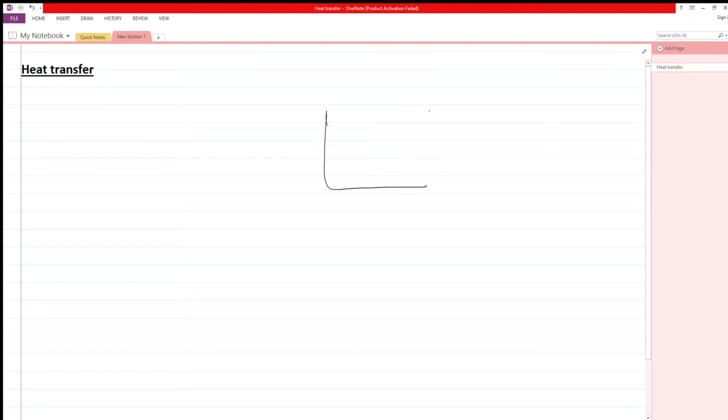So today we are going to start the basic definitions of heat transfer. Actual में heat transfer होता क्या है? So let us consider a beaker. एक beaker अगर हम ले लेते हैं, आप सभी ने beaker अपने घर में देखा होगा. Let us consider a beaker and उसके अंदर पानी अगर भर देते हैं हम, तो it is filled with water.

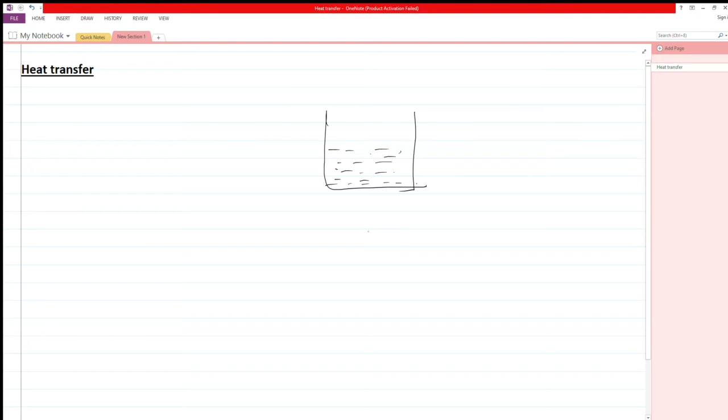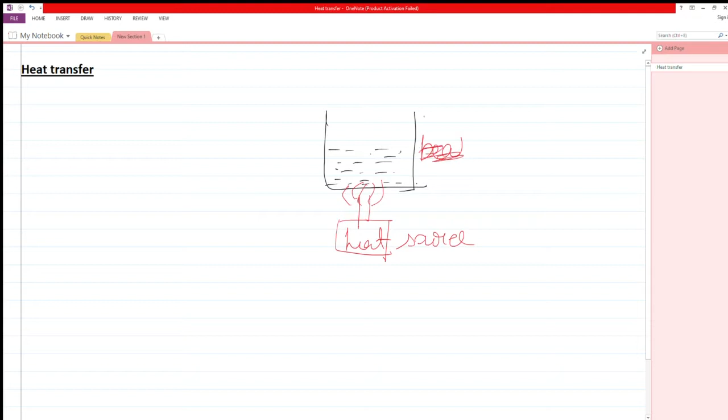And now some flame is there, some heating source we are providing, some flame is coming. This is a heating source, and this is a beaker. Anything you can call it, a container. एक कंटेनर आपने ले लिया और इसके अंदर ये जो है वाटर फिल्ड है.

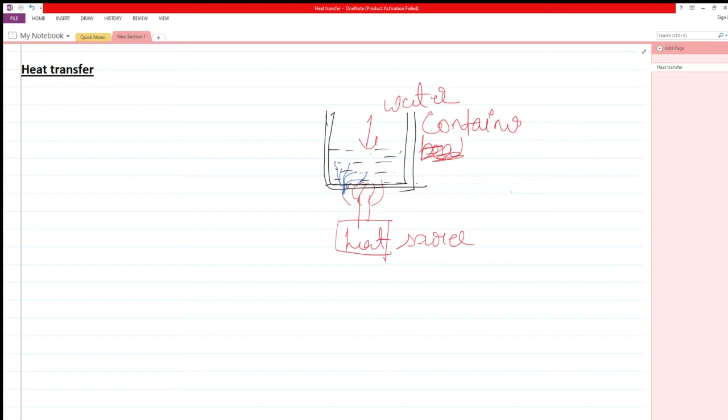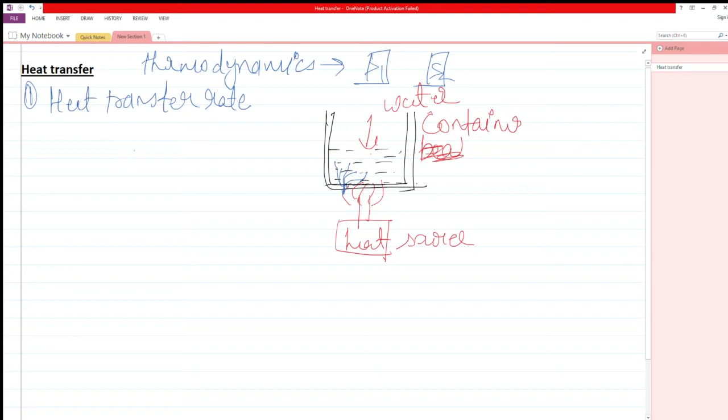The word heat you have already studied previously in a subject called thermodynamics. Thermodynamics में भी आपने heat को पढ़ा है. In that subject you used to study what is heat and how much amount of heat is being transferred from one system to another system, from system 1 to system 2, or from system to surrounding. But now in the case of heat transfer subject, you will be studying at what rate the heat transfer is taking place. So this is the basic difference between the heat transfer and the thermodynamics.

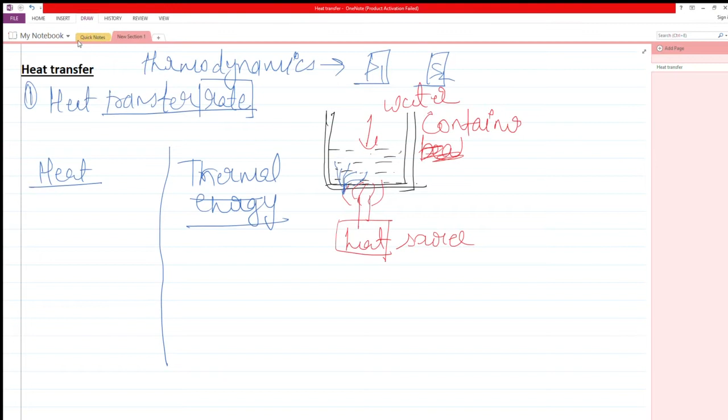So starting with the heat transfer, you are already concerned with the heat. There is a basic difference between heat and thermal energy. If I say heat and then if I say thermal energy, there is a difference between heat and thermal energy. If I talk about the difference, the first and the foremost difference is thermal energy is energy due to randomization. मॉलिक्यूल्स के रेंडमाइजेशन की वजह से जो एनर्जी होती है, दैट इज थर्मल एनर्जी.

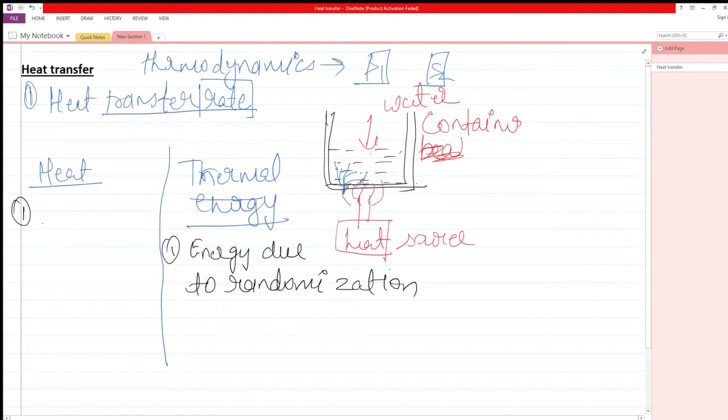बट व्हेन दिस थर्मल एनर्जी इज इन ट्रांसफर, this thermal energy is in transfer, in that case it will be considered as heat. So the term heat is of prime importance when we talk about the transfer of heat. For example, I am having a container and it is filled with some gas.

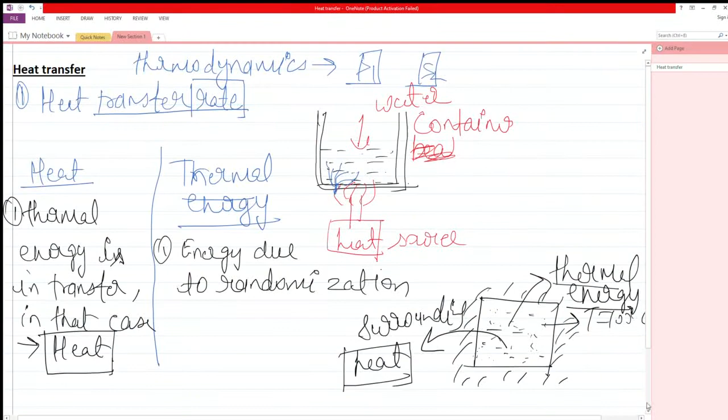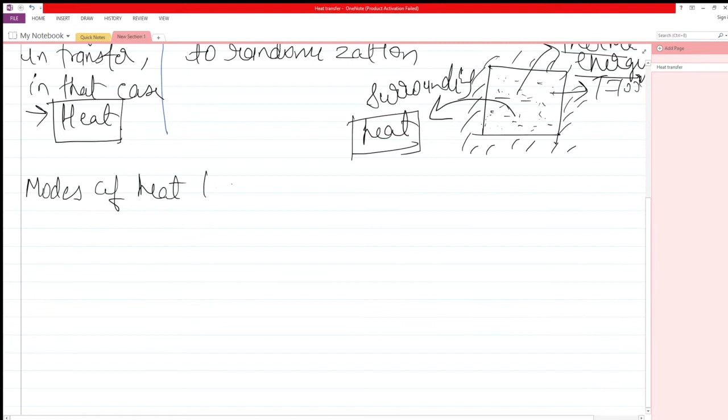So till now we have understood what is heat and what is thermal energy. What is heat transfer? We are also seeing what is heat transfer. The movement of heat from one place to another place is heat transfer. Now let us talk about the different modes through which the heat transfer takes place. Modes of heat transfer. This is very important to understand.

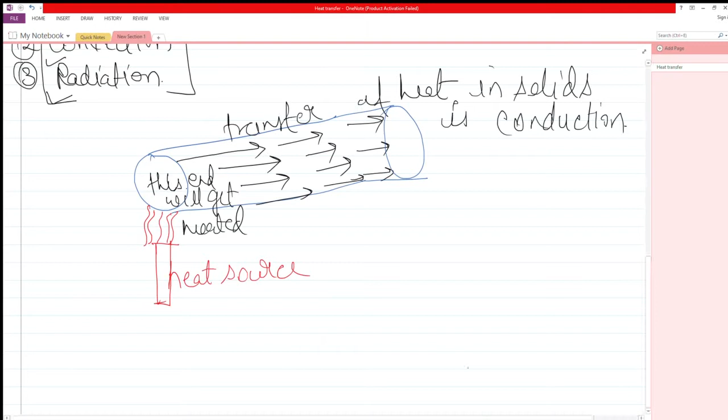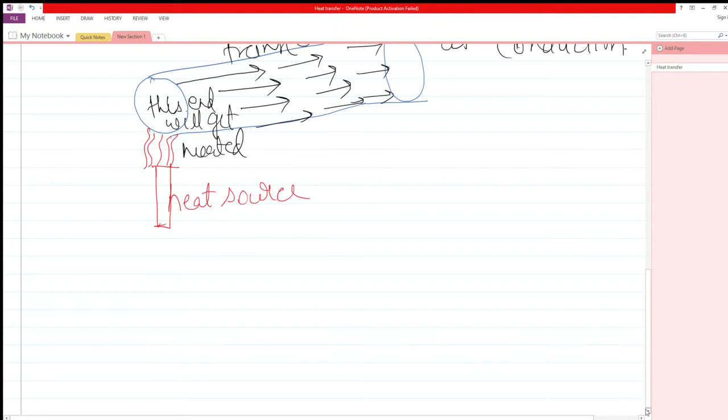Let us see it again. We have a rod. One end of the rod is subjected to certain kind of heat. The heat is getting conducted from one end of the rod to the next end. How it is happening, that is what we have to study. Let me again draw this rod.

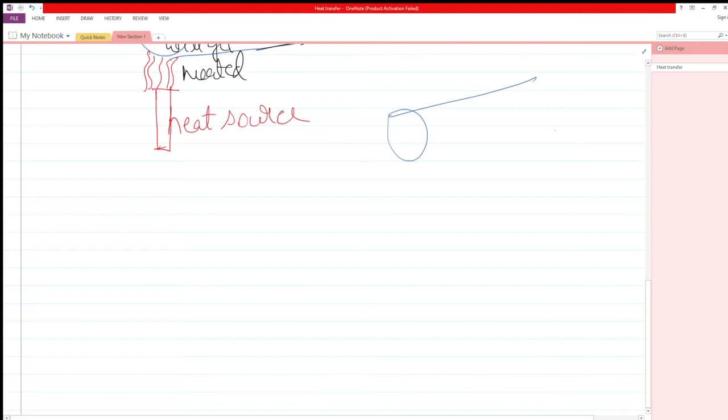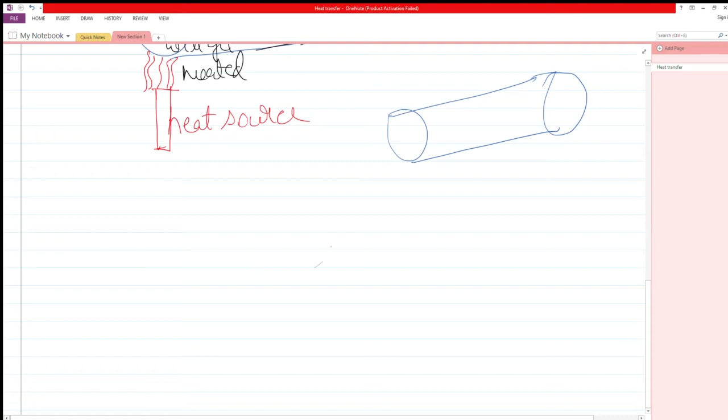So this is the rod. This is the cylinder we have. Let us say there is some heating source, and it is being heated at one end. Since it is a metal conductor, ये एक metal rod है. This is a metal rod.

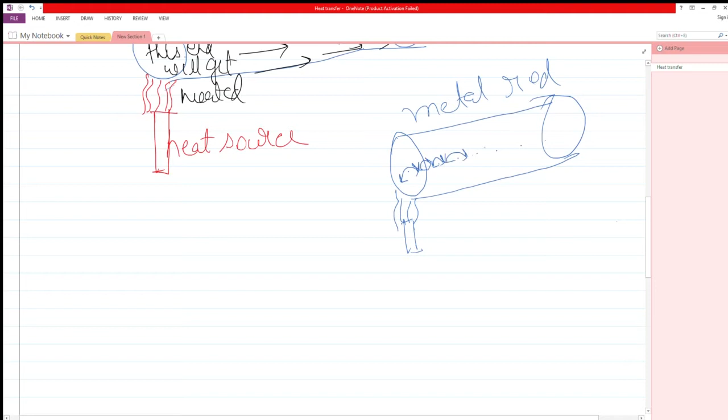In the metal there are certain free electrons available. These free electrons will start vibrating when they get heat from the heat source, and these vibrations are transferred from one electron to another, from second to third, third to fourth, and fourth to fifth. This is how the vibrational energy of free electrons keeps transmitting from one place to another, and this is how heat transfer takes place because of free electrons. So one cause for heat transfer to take place is free electrons.

Second is the metals. All the metals have a certain lattice arrangement, and these molecular lattices start vibrating when they receive heat, and because of the vibration of one molecular lattice, another molecular lattice in its surroundings will also start vibrating. Let's say there is one molecular lattice, a second, third, and so on. If the vibration of one lattice starts, it is transferred to another lattice, and then to another. This transfer of the vibration of the molecular lattice is called molecular vibrational energy transfer. Because of this transfer, thermal energy, that is heat, is also transferred from one place to another.

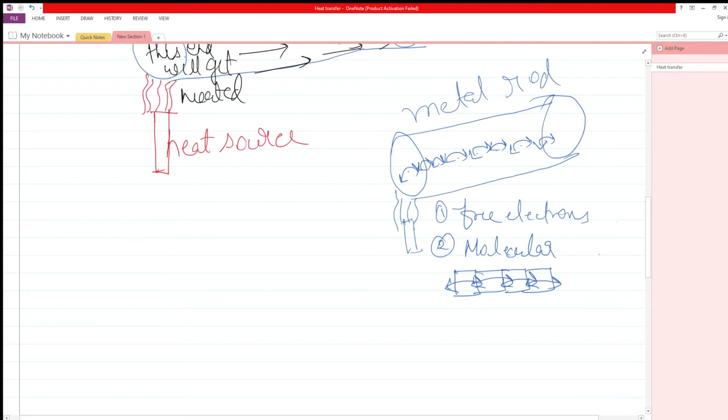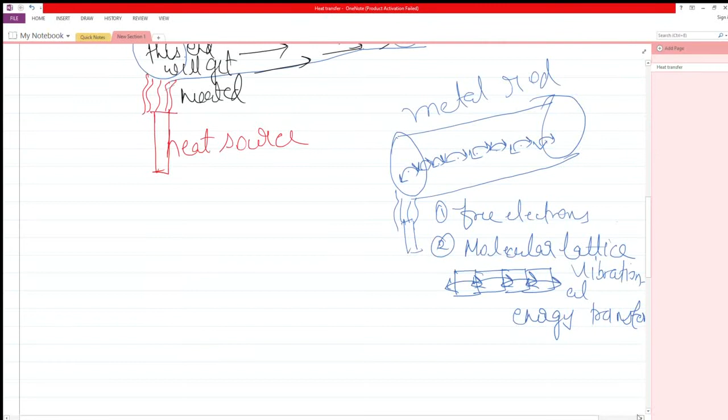Therefore, the cause of heat transfer in conduction is molecular lattice vibrational energy transfer. Now, out of the total energy transfer in conduction, 70% takes place because of free electrons, while 30% takes place because of molecular lattice vibrational energy transfer.

So now we have understood what thermal conduction is and how it takes place. Let us now see certain known thermal conductors and their conductivity. First is silver, with thermal conductivity of 405 watt per meter Kelvin. This is the best known metal thermal conductor. Second is copper, with thermal conductivity of 385 watt per meter Kelvin. Third is gold, with thermal conductivity of 319 watt per meter Kelvin.

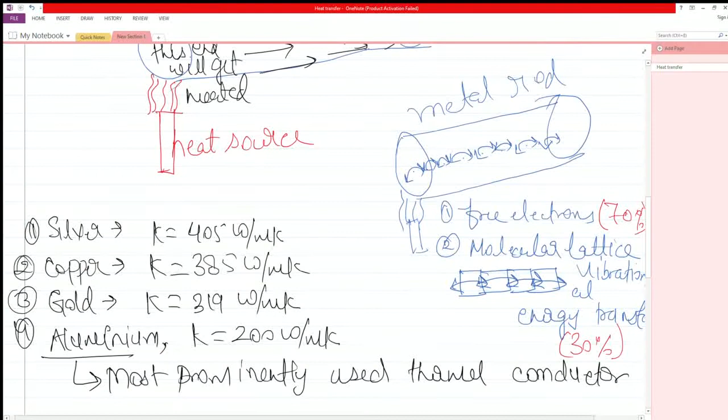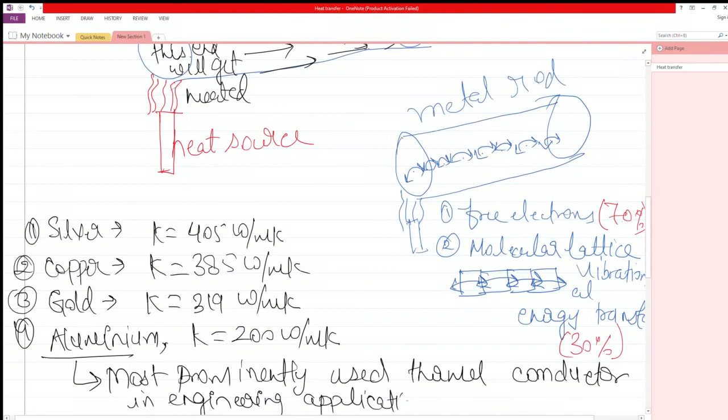And fourth is aluminium. Thermal conductivity इसकी होगी 200 watt per meter Kelvin. Aluminium is the most prominently used metal thermal conductor in engineering applications because of its weight, availability, cost, and thermal conductivity. It is the most prominently used thermal conductor in engineering applications.

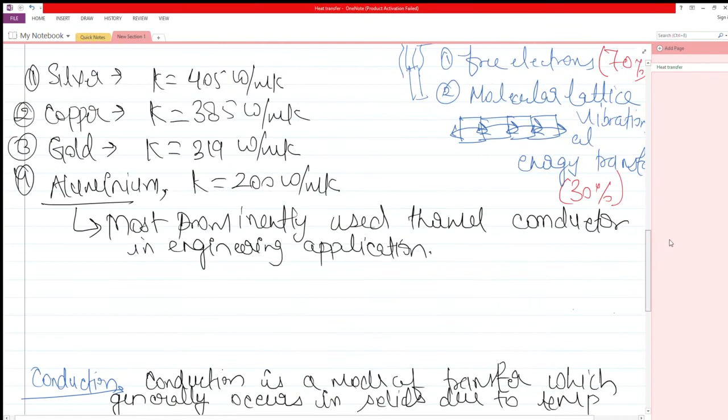Now, till now we have understood what conduction is. So we can define conduction as a mode of heat transfer. I have already written this definition. Conduction is a mode of heat transfer which generally occurs in solids due to temperature difference by molecular vibrational energy transfer. This is one cause, and also by free electrons. This is another cause.

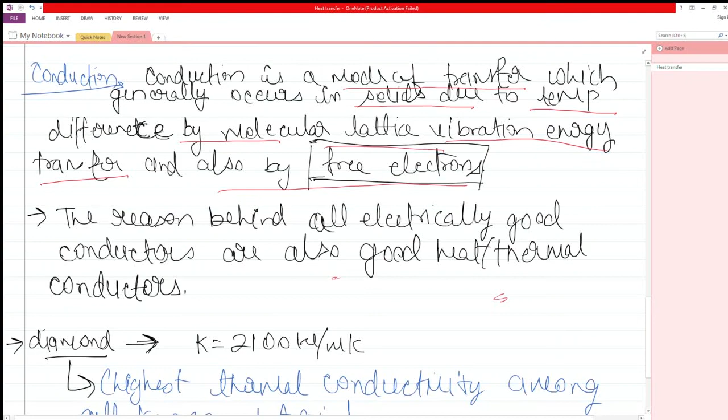All the good electrical conductors are also good heat conductors. जितने भी अच्छे electrical conductors होते हैं, they are also good thermal conductors. This is because of the availability of free electrons in such materials. There are certain non-metals also that have very high thermal conductivity. The example is diamond. Diamond has high thermal conductivity because of the second cause of thermal conduction, that is molecular lattice vibrational energy transfer.

There is a very high rate of heat transfer because of the perfect lattice arrangement in diamond. A perfect molecular lattice arrangement is there in diamond, and because of this, molecular lattice vibrational energy transfer is very high, very fast. Therefore, diamonds have very high thermal conductivity, that is 2100 watt per meter Kelvin, and this is because of the perfect molecular lattice arrangement.

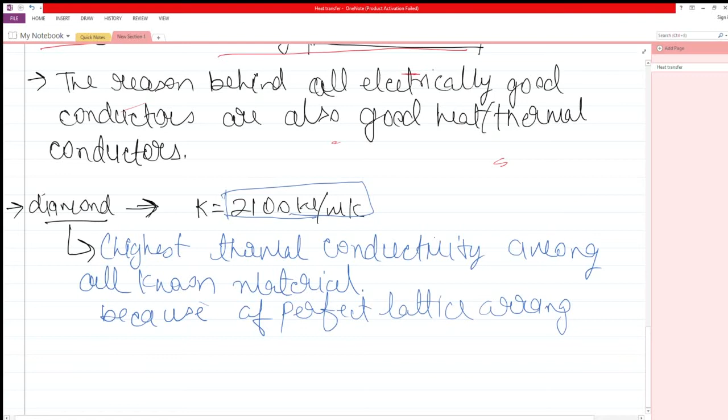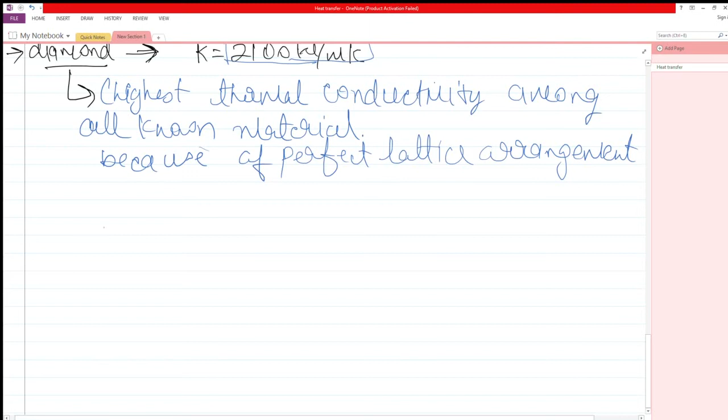Perfect lattice arrangement. Till now, we have understood what is conduction. There is one more point regarding the thermal conductivity. First thing is, thermal conductivity of pure metal is always greater than its alloy.

Thermal conductivity of pure metal is greater than its alloy. For example, thermal conductivity of copper is higher than the thermal conductivity of brass.

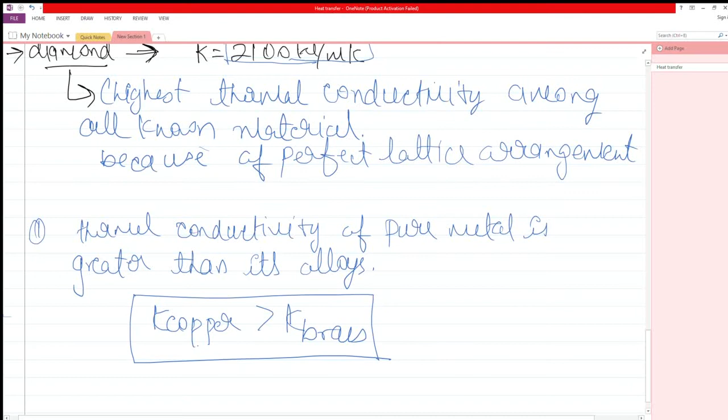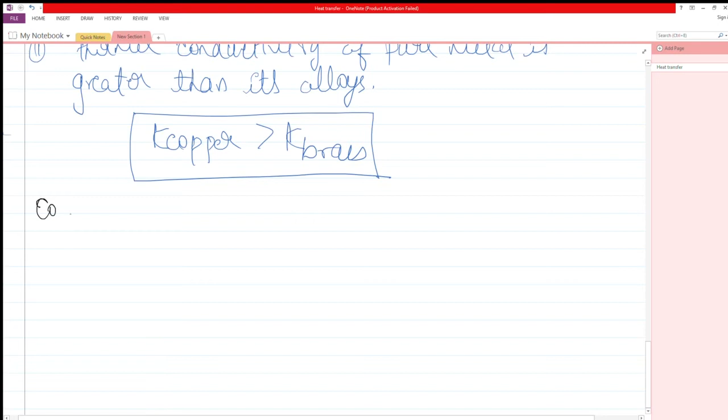Now we will see one more thing, that conduction is there in the gases also. Yes, gases also do conduct heat. Therefore, the conduction in gases we'll see. Next topic is conduction in gases. Conduction in solids we have seen. Conduction in gases we will now study. Try to understand.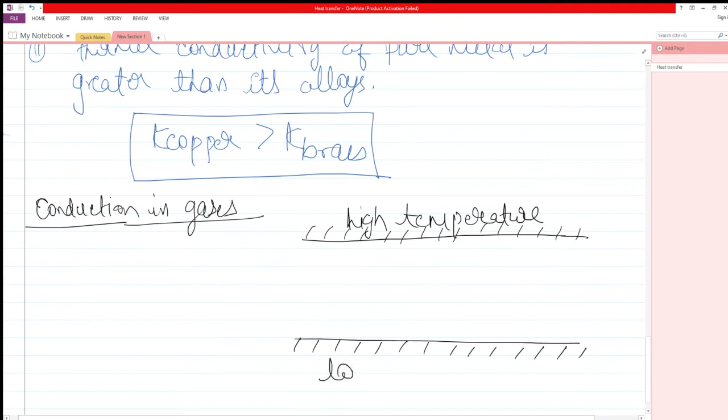For example, let us consider there are two plates, two walls. One is at high temperature and one is at low temperature. Let's say this is the high temperature wall and this is the low temperature wall. And between these two walls there is gas that has been filled.

Now, from kinetic theory of gases, we know that the gas that is at higher temperature will possess the higher molecular momentum. The molecules of the gases will be having higher velocity at the higher temperature, while the molecules of gases kept at low temperature will be having a lower momentum, lower velocity.

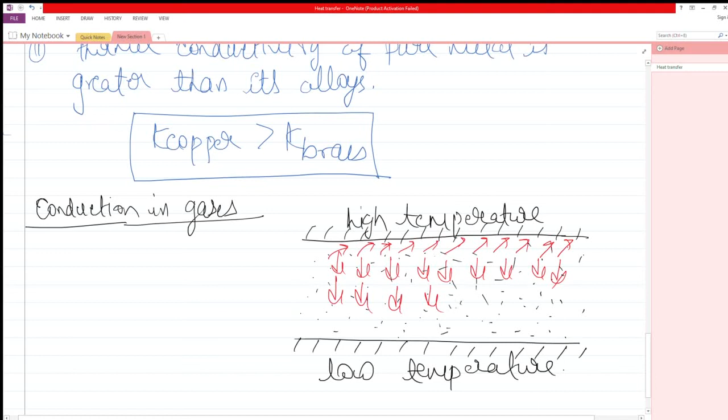When the gases come in contact with the high temperature wall, the molecules of that gas will possess higher momentum and their velocity increases. Because of higher momentum, these molecules collide with other molecules of the gas, and molecular momentum transfer takes place from one plate to another, from high temperature side to the low temperature side. This is how heat conduction takes place in gases.

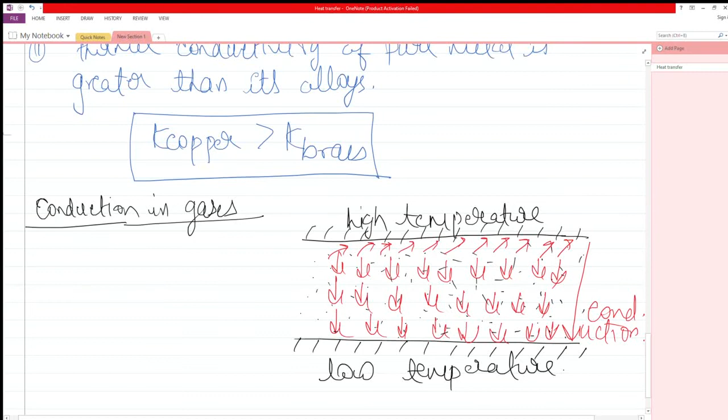Therefore, conduction in gases takes place due to molecular momentum transfer. Root mean square velocity of the molecules of gases is directly proportional to the under root of absolute temperature of the gas. The root mean square velocity is directly proportional to under root T, where T is the temperature at which the gases are kept.

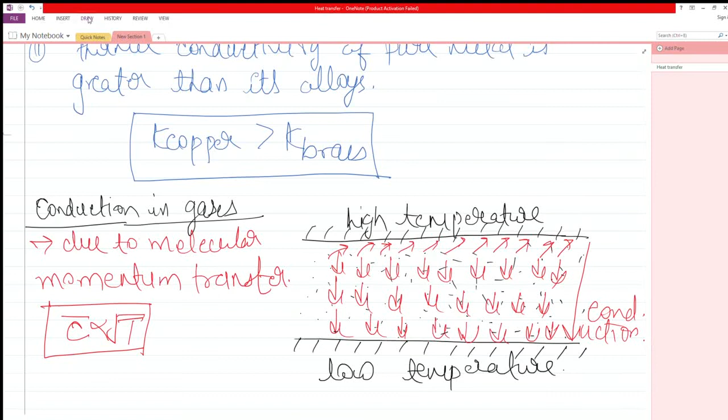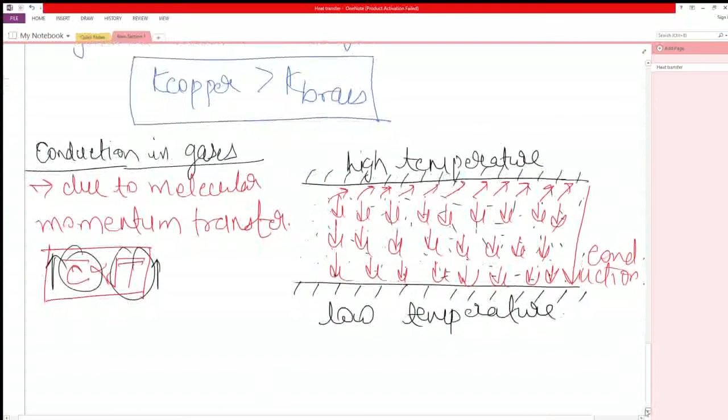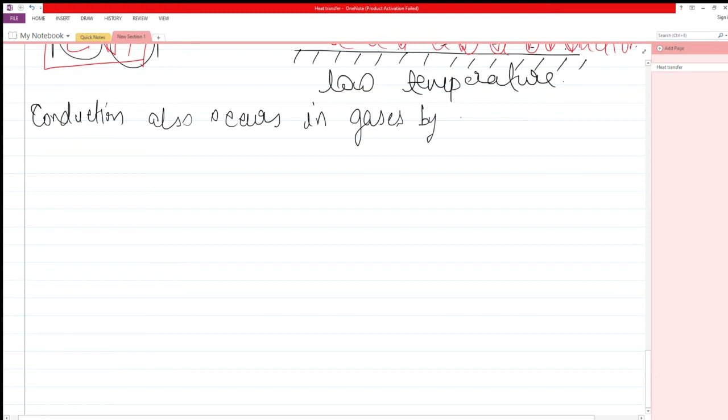Therefore, as the temperature increases, the velocity also increases. This is what we have seen here in conduction in gases. Let us now write about this conduction. Conduction also occurs in gases by molecular momentum transfer.

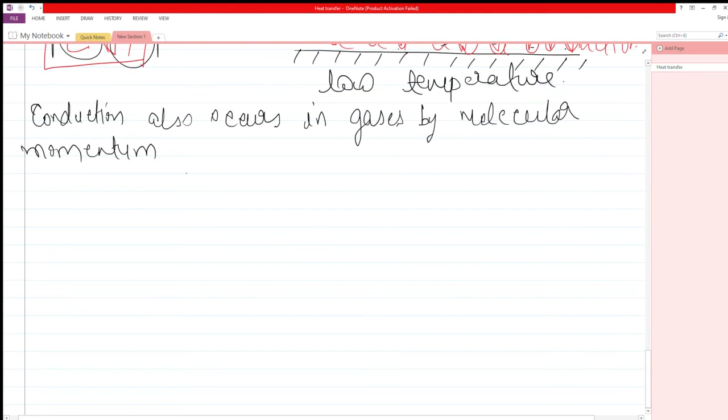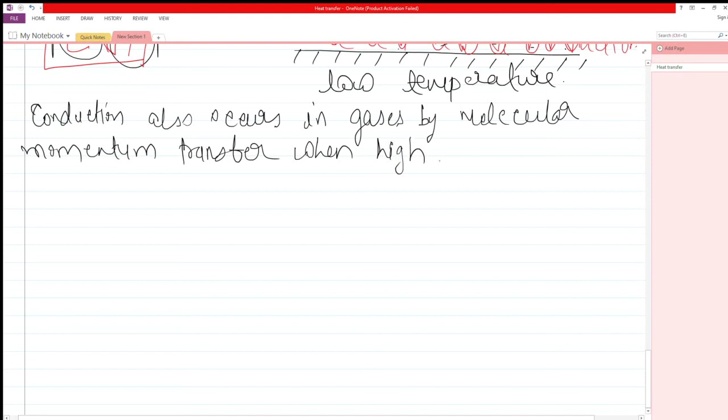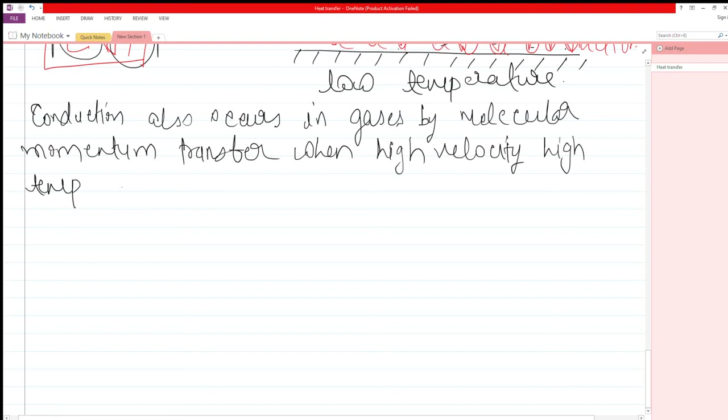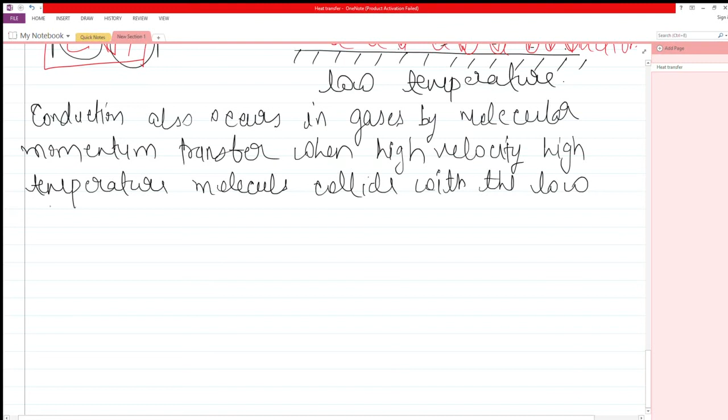When high velocity, high temperature molecules collide with the low velocity, low temperature molecules. Generally, gases are very poor heat conductors.

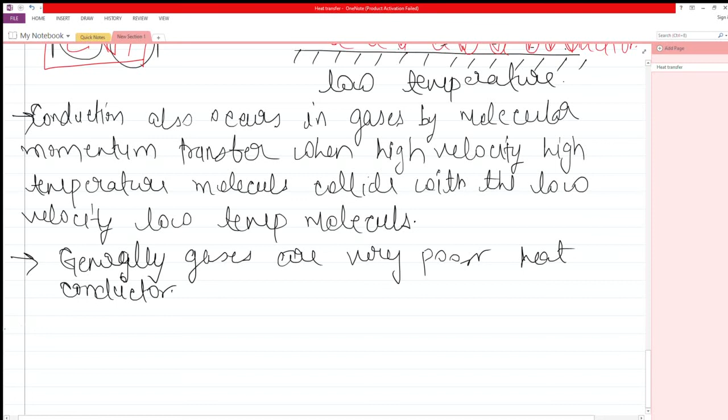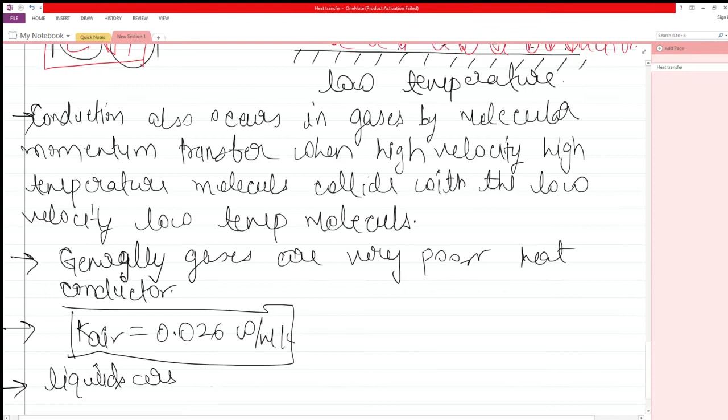Now, if we talk about the thermal conductivity of air, it is 0.026 watt per meter Kelvin, which is very low. Liquids are better heat conductors than gases. If we compare the liquids with the gases, liquids are better heat conductors as compared to gases.

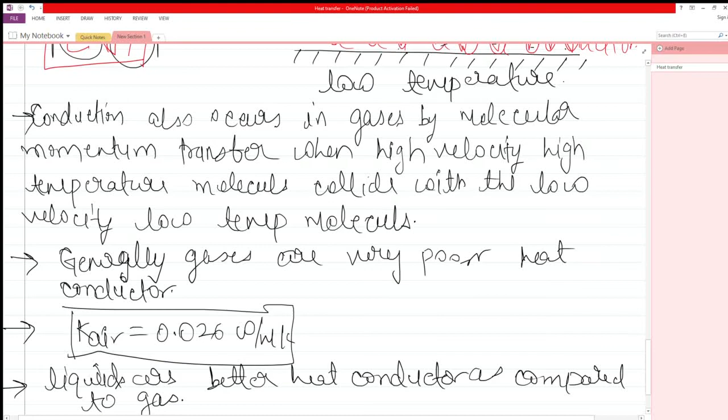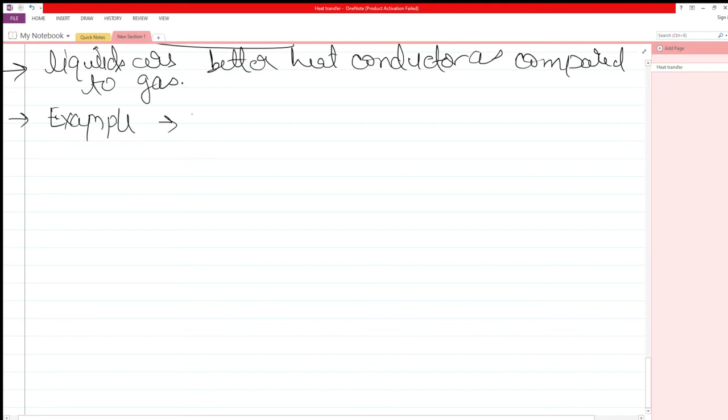Example is water. The thermal conductivity of water is 0.61 watt per meter Kelvin, while thermal conductivity of air, as we have just seen, is 0.026 watt per meter Kelvin. Among liquids, the best known thermal conductor is mercury, and its thermal conductivity is so high that it is also called liquid metal.

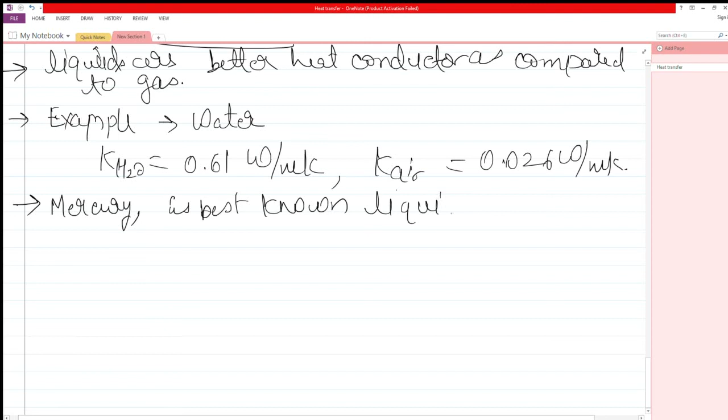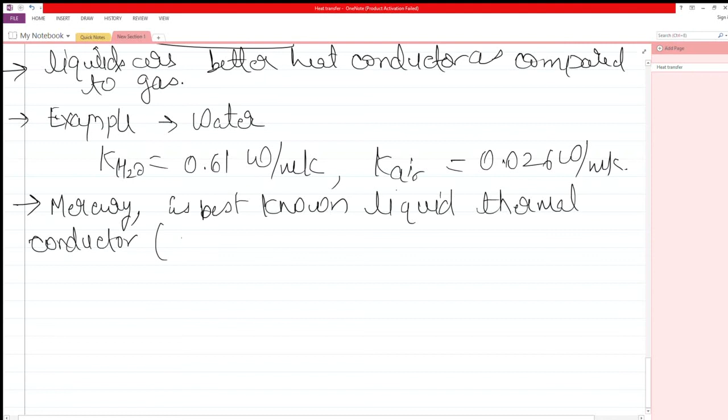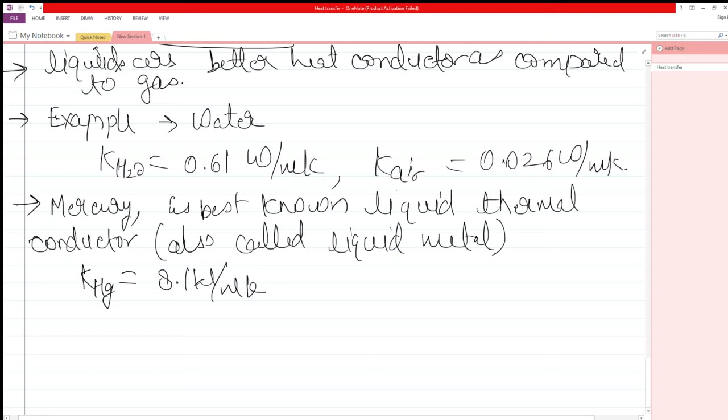Mercury is the best known liquid thermal conductor. It is also called liquid metal. Thermal conductivity of mercury is 8.1 watt per meter Kelvin, which is highest among all liquids.

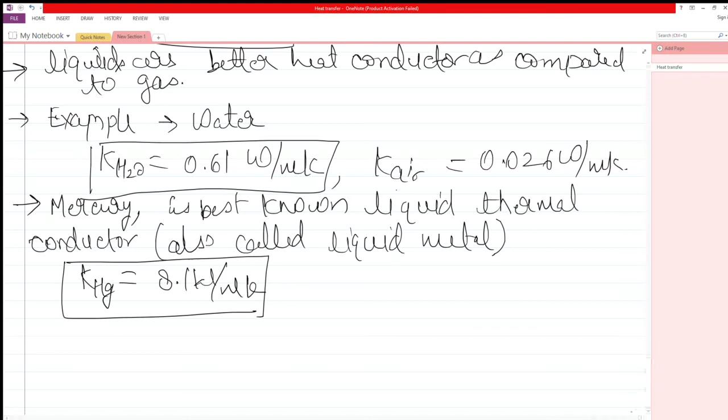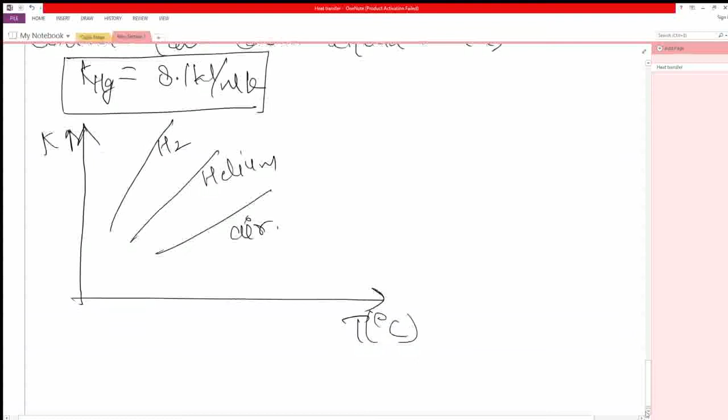So this is the end of this lecture comprising of conduction. In the next lecture, we will understand the topic of convection. Thank you.